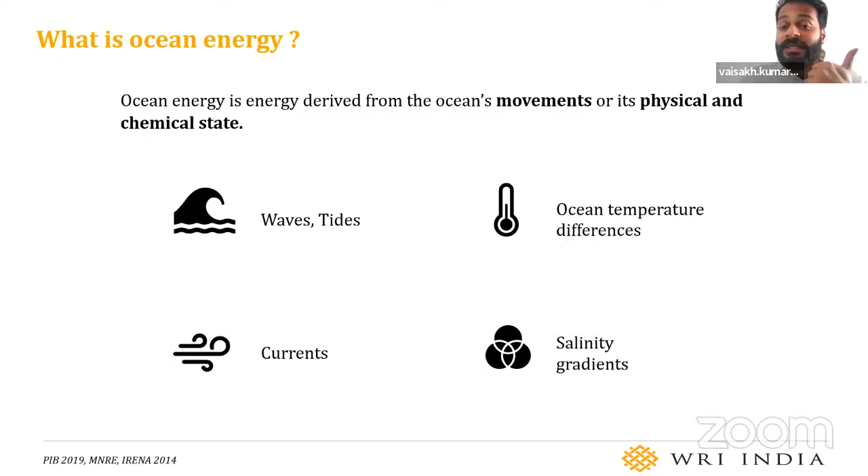Okay, so going through this one by one, just one sec. Yeah, so going through these technologies one by one to get to know them a bit more deeper.

The first popular way ocean energy is extracted is through ocean wave energy converters. They work on the principle of absorbing the kinetic energy and the potential energy present in the waves, or sometimes both, depending on the technology. Although there are many different technologies for wave energy converters, most of them can be classified under 3 main operating principles. Whichever wave energy technology is being developed, at the prototype or R&D stage, can be classified under these 3 main operating principles.

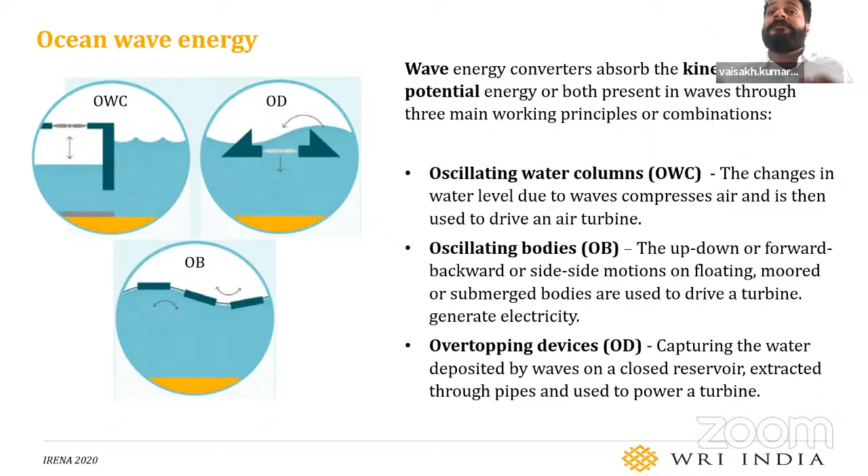The third working principle is called overtopping devices, OD, where there are structures that capture waves or the water deposited by the waves on these structures, which is then held and extracted through a pipe to power a turbine. So these are the 3 different working principles on which different wave energy technologies can be classified.

Moving on to ocean tidal energy, this works on 2 principles. One is based on the tidal cycle. Based on the 12-hour tidal cycles, once the tides come in, there is a difference of height, and it also harnesses the inflow and outflow of the tides. Based on these 2 concepts, you can have a tidal barrage system or a tidal stream.

A tidal barrage system works on a similar principle to a hydropower station. When it is high tide, the water at a higher level is held in a barrage, and once there is low tide, the water at this higher level is focused through a pipe, which then runs a turbine. So this is how power is extracted.

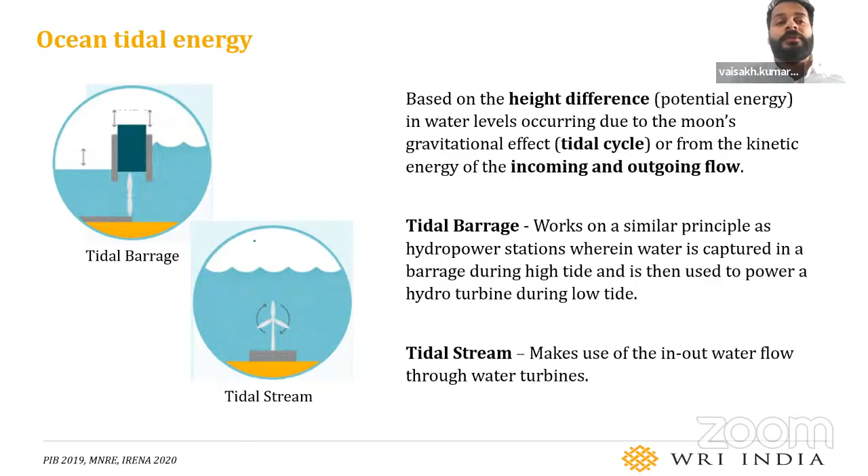The second is the tidal stream method, where with the onset of the tide, we see water move in and move out. This flow of water is harnessed through tidal streams - we have turbines or different technologies that may look like wind turbines, but these are actually water turbines placed underwater. When the tides come in and out, the water flows across these turbines, causing motion, and power is generated. So these are the 2 principles on which ocean tidal energy works.

Third, coming to ocean current energy - we have these global ocean currents, something similar to the Gulf Stream, that happen in particular patterns. So we can place turbines or different technologies on the path of these ocean currents to get power from them. But compared to wave and tidal, this has not progressed as much, because usually these ocean currents are located far offshore and in much deeper waters. So research development, pilot projects, demonstration projects, or R&D is much more difficult. Hence this has not witnessed much technology development compared to technologies like tidal or wave.

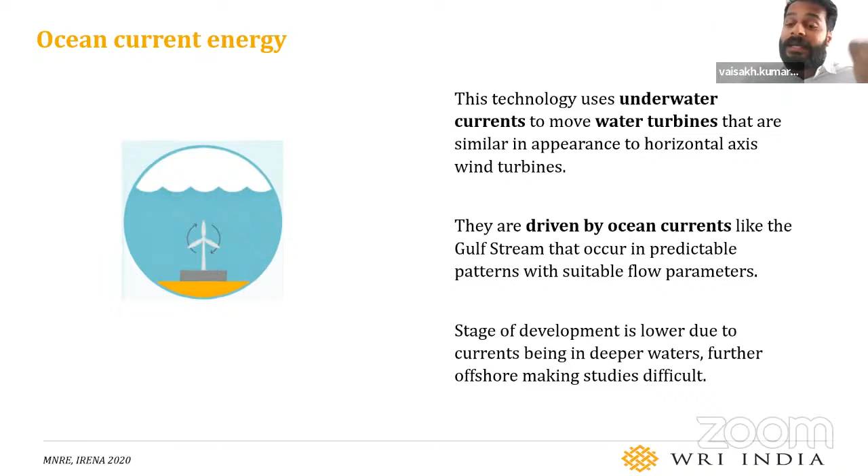Coming to the fourth concept, we can harness the temperature difference of the ocean. If you go deep, there is a drop in temperature, and at about 1000 meters depth, the temperature is more or less constant at about 4 degrees centigrade. For this technology to work successfully, we need a temperature difference of about 20 degrees centigrade. So if the surface temperature is more than, let's say, 25, it creates a temperature difference.

This temperature difference is used to power turbines through different types of thermal cycles. One is the open cycle, where the warm water on the surface itself is vaporized and used. The next is a closed cycle, where instead of warm water, another working fluid is used. Or when the open and closed cycle work one after the other, with the closed cycle working first and then the open cycle, this is considered a hybrid cycle.

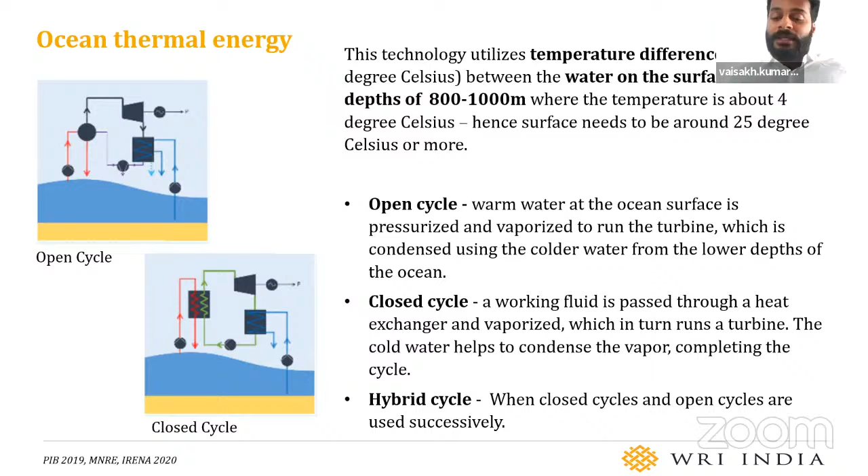So in summary, this harnesses the fact that there are temperature differences between the depths of the ocean. That is how ocean thermal energy is extracted. It's also commonly abbreviated as OTEC.

The next and last technology we'll be covering is the ocean salinity gradient. Basically, waters of different salt concentrations are held across a membrane, which causes the flow of ions, or creates a potential difference, or creates a pressure change, which then drives this particular technology.

With respect to ocean salinity gradient technology, two types of technologies have seen development: one being pressure retarded osmosis, PRO technology, and one being reverse electrodialysis, RED technology. So these are the different types of technology.

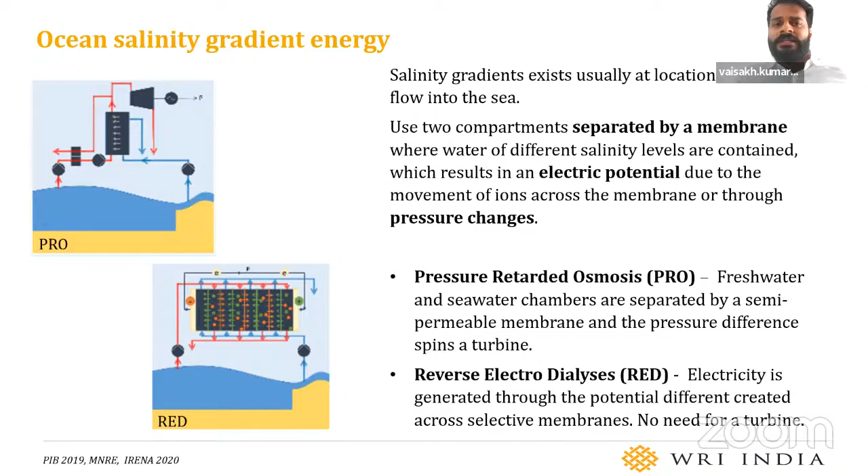To quickly see how the technologies have been progressing, or what the future potential is: we can see that tidal barrage is the technology that dominates the market with the most deployed capacities. Going forward, tidal stream may be picking up, along with wave technologies, which are being scaled up, with capacities of 1 megawatt and more being successfully deployed.

Looking at what's happening across the world, tidal stream is reaching commercial maturity compared to other technologies. There is also a convergence of technology where horizontal axis water turbines are being used, and the technology convergence is happening towards horizontal axis water turbines.

Wave energy is mostly in its prototype demonstration and scaling up phase, and wave energy technologies have yet to witness a definitive convergence towards a particular technology. Existing wave energy is being deployed through scaling up or deploying more such units in the form of arrays.

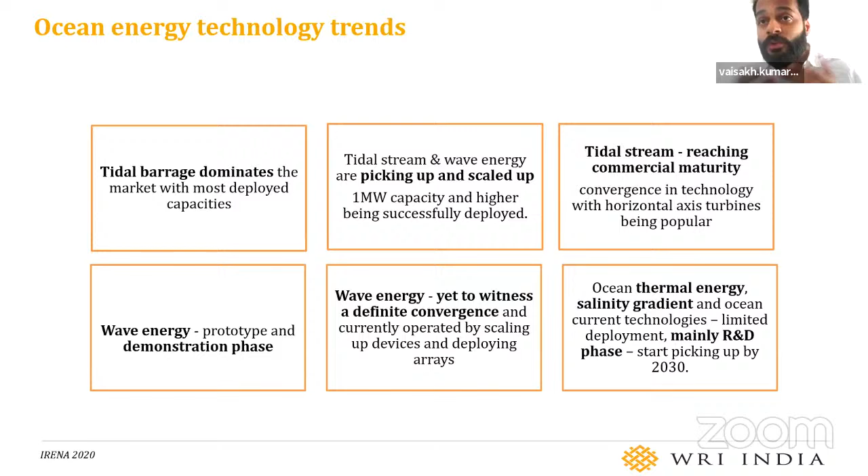When it comes to the other technologies we've seen, be it ocean current, ocean thermal, or ocean salinity gradient, these have seen limited deployment and are mainly restricted to the R&D phase, meaning mostly research and development in labs. But this is expected to start picking up by 2030 and later. So this is a quick overview on how these different technologies are doing right now and what may happen in the coming future.

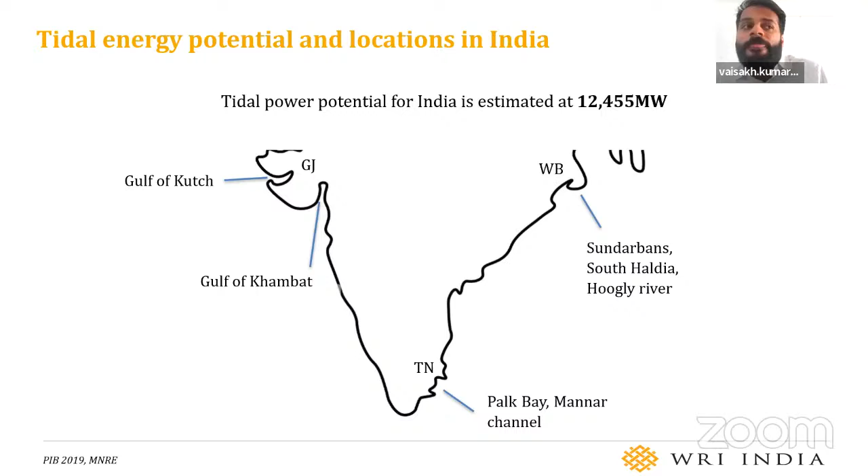Looking at some of the identified tidal power potential for India: the states of Gujarat, Tamil Nadu, and West Bengal, combined, have a tidal power potential estimated at about 12.5 gigawatt. Places where tidal power can be harnessed have been identified as the Gulf of Kutch and Gulf of Khambhat in Gujarat, the Palk Bay or the Mannar Channel in Tamil Nadu, and in West Bengal, areas like the Sundarbans, South Haldia, or the Hooghly River, where we can set up plants to harness tidal power.

Looking at the wave energy potential, this is estimated at around 40,000 megawatt. If we combine wave plus tidal potential, it comes to about 52 gigawatt of potential. There is not much information on the potential for the other technologies, so there is more scope for research and studies there. Also, when it comes to wave energy potential, studies have said that the western coast is estimated to be better for setting up wave energy projects.

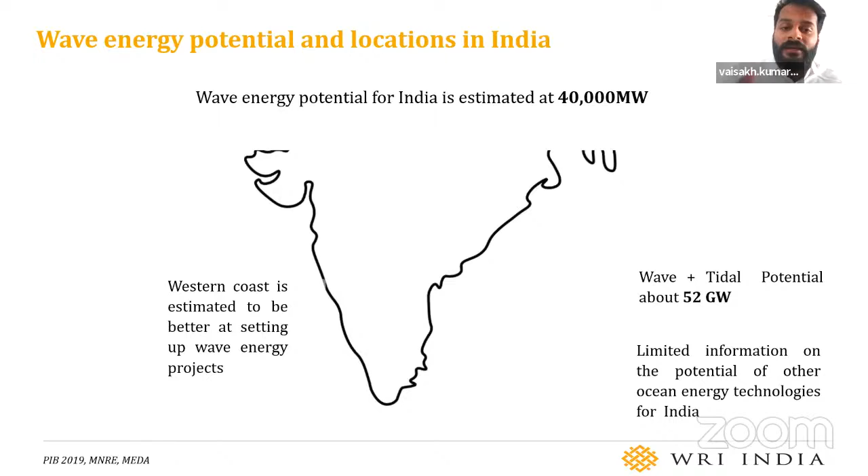That is why one of the first wave energy projects was set up in Kerala, on the western coast. So looking at the progress of different ocean energy technologies in India and some of the major developments in what has happened so far.

Also, we have seen that previously there were tidal energy projects planned for different states, but those have not witnessed much success due to the same reason being the high capital costs for setting up these plants.

Also, one of the first wave energy projects, a 150 kilowatt pilot project, was set up in Vizhinjam in Trivandrum, but this was set up back in the 90s and was decommissioned in 2011.

But there is a plan to set up a new 1 megawatt wave energy plant at a cost of about 15 to 20 crore in Kerala itself. Also, there is a plan to set up a 65 kilowatt ocean thermal energy conversion plant in Lakshadweep.

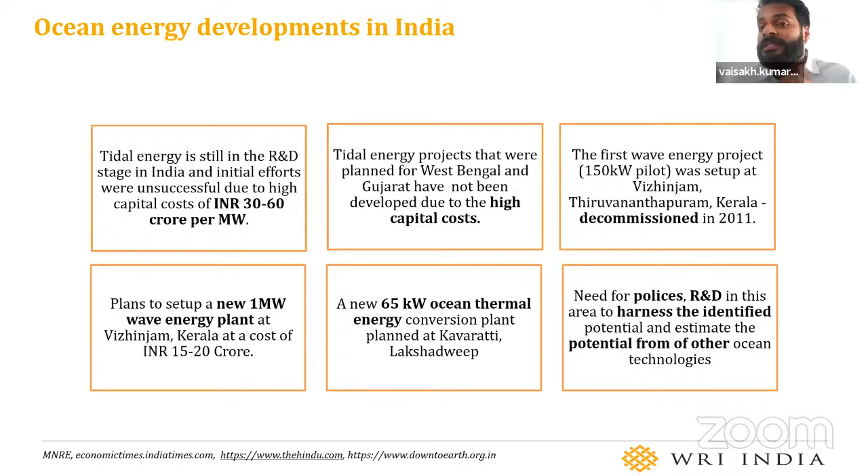What we can see is that there is a need for more policies, R&D, and efforts, so that the existing potential can be harnessed, and we can estimate the potential from other technologies that have not been estimated so far.

With that, I would like to conclude my presentation, and then back to you, Kajol.

Thanks, Vaishak. Thank you for the presentation. As I see, there is good potential for ocean energy in India, but there have been few challenges and barriers in scaling it up, considering the finance side or the maturity and readiness of the technology.

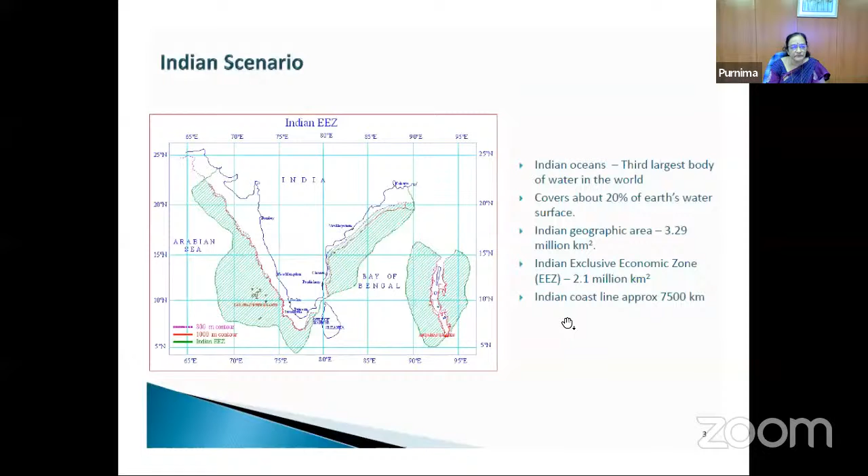Can you see the screen now? Yes. Can everybody see? Yeah, so this was the EEZ slide, which I showed. The next one—these are the forms that, yeah, so okay, here we are.

I was talking about this—this was the first ever self-powered desalination plant, and our priorities changed, so we decommissioned this in the year 2011.

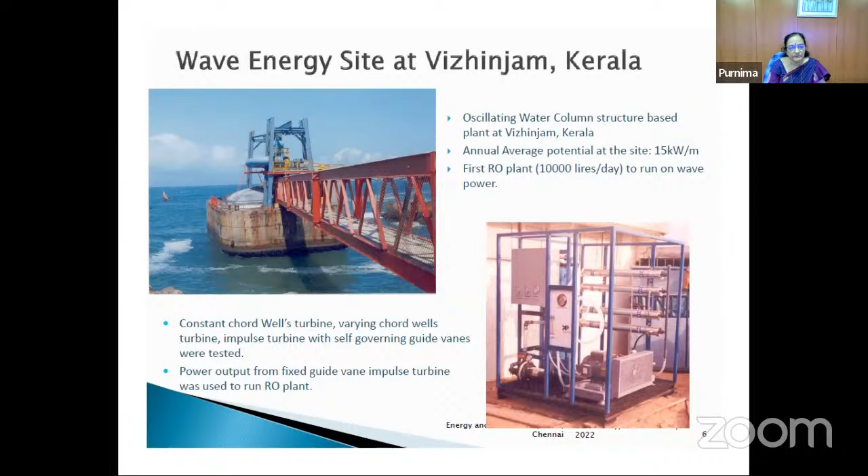Because we had larger programs on hand, we did not stop the wave energy activities, but we decided to move to floating devices for off-grid requirements in remote locations. One of them was the backward bent ducted buoy, which was the first small offshore plant that we did several trials on. We developed everything in-house, including the turbine. It was an oscillating water column based device, and that was successful in all our trials offshore.

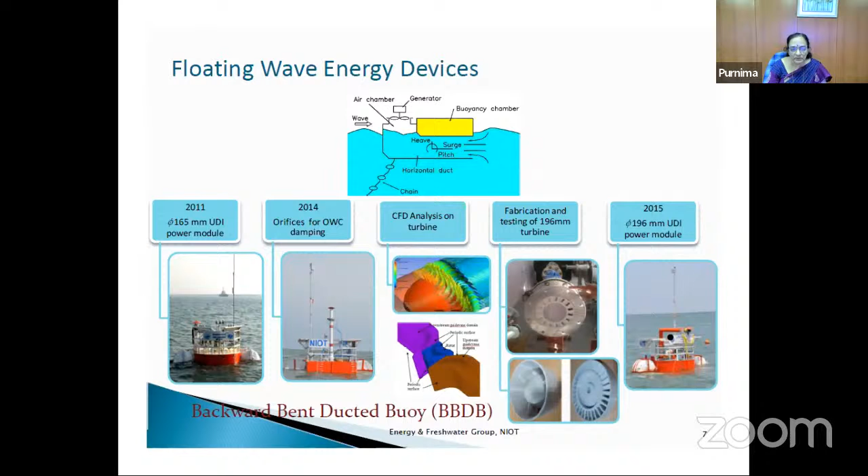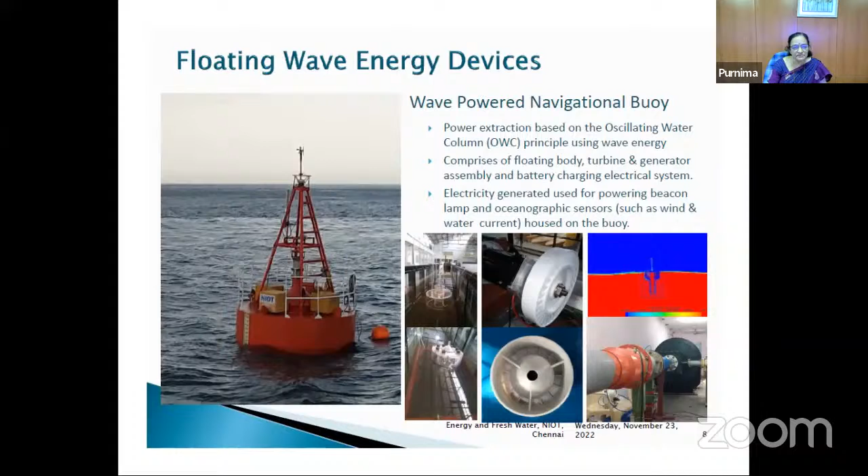This led to the development of the wave powered navigational buoy. Navigational buoys are required in all ports and harbors, and a lot of them are still being imported today, using solar panels for their power requirements. Here is a buoy we have developed which generates power from wave energy and lights the navigational lamp. But because it generates more power than required for the lamp, we have put current meters, wind sensors and other sensors on the buoy, with the port's requirements in mind. The data goes to the port directly on a mobile, which is a value addition for them, and they're very happy. This is functioning as one of the navigational buoys in the Ennore port today. We have also transferred the technology to a few industries, and we will be making more of those shortly.

This is something we have again developed in-house, from the CFD analysis through the wave flume testing all the way to the actual prototype demonstration in Andaman. Places like Andaman are requiring and have requested me for 1 to 5 kilowatt off-grid units, because these are security areas with just a few manpower in remote locations, and they don't have access to power or water. This is also something we have developed in-house and is ready to be scaled up.

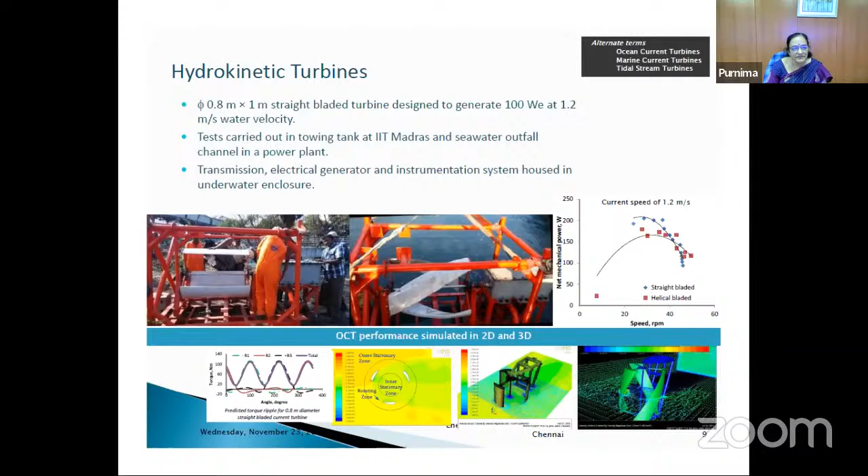This is the demonstration that we did in Andaman—just a few pictures of that.

The in-house development of low-speed alternators had to be taken up because around the Indian seas, the velocities of tidal streams and ocean and marine currents are fairly low. Alternators for such low speeds are not available off the shelf, so we had to develop these in-house. So we have the entire power module, the turbine and the generator already developed in NIOT.

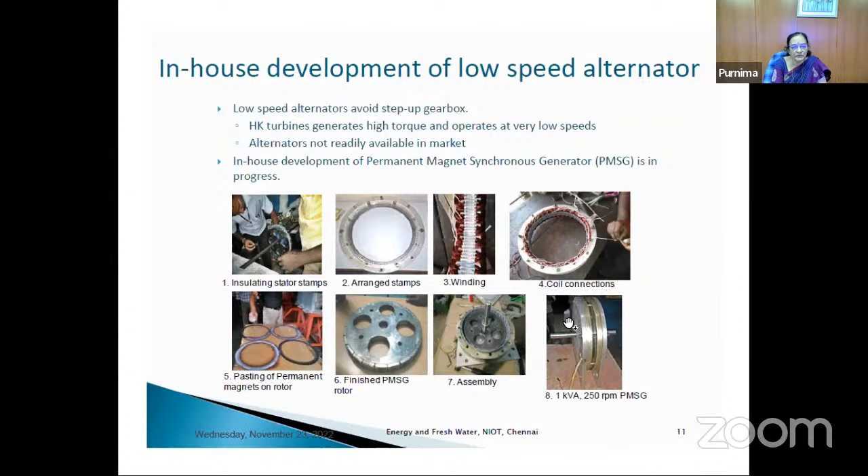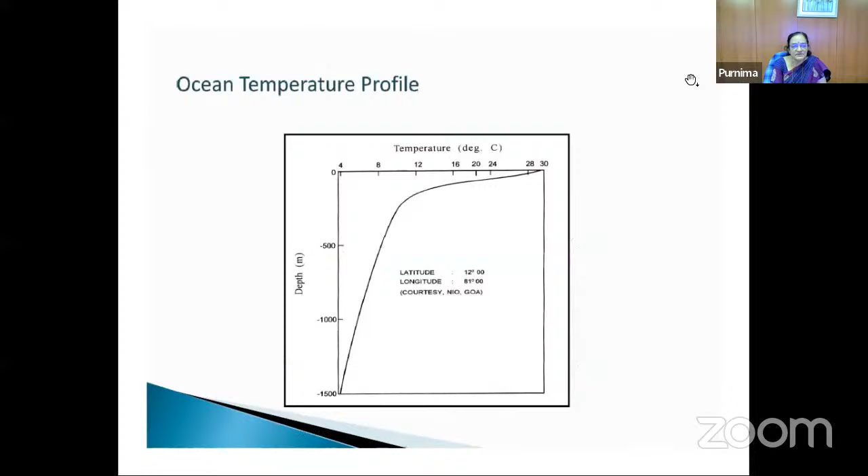Now comes the ocean thermal gradient. As Vaishak had mentioned, as you go deeper the water gets colder, and a large belt around the equator is where the temperature gradient hovers between 19 and 22 degrees Celsius, and this can be utilized to generate energy.

This is just a picture of the OTEC cycle. I'll talk about it later.

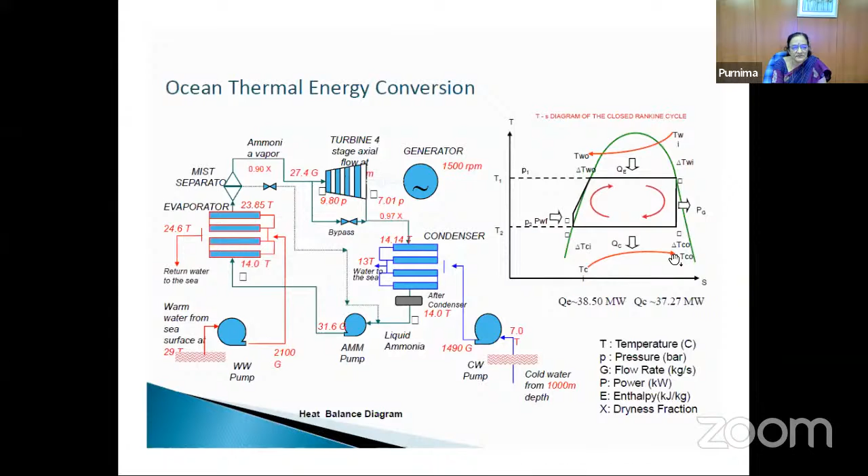Way back in the year 2000, we were very ambitious and decided to put up the first ever floating 1 megawatt OTEC plant at Tuticorin. We built everything indigenously, including the barge, though the heat exchangers were imported. The pipe is a 1 kilometer long pipe of 1 meter diameter, and all the subsystems were tested. However, we could not deploy the pipe because the marine infrastructure in those days was not available. We did not have adequate infrastructure and the right kind of vessels to do this deployment, so the final connection of this pipe could not be made to the barge.

Since we are the government, we had to have a series of review committees on how to take the project forward. It was decided that we were not yet ready for deep waters, so we decided to do desalination, which also uses the ocean temperature gradient, but in shallower waters, maybe like 300 meters.

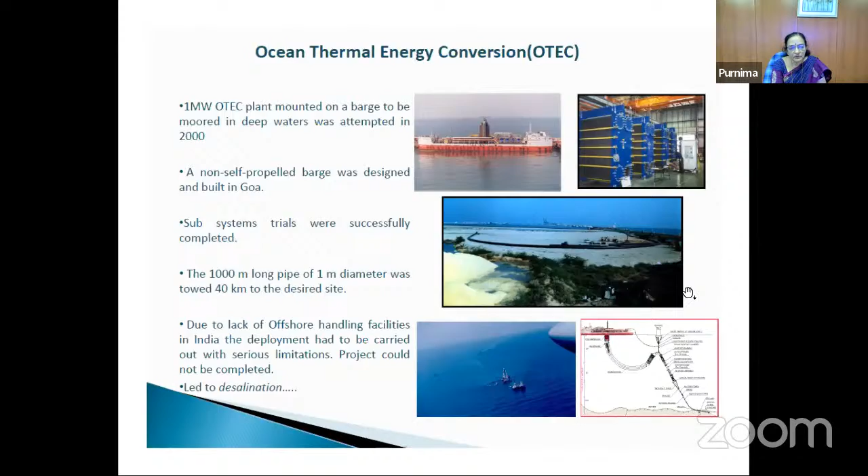This was the genesis of the first ever desalination plant in Kavaratti in Lakshadweep in the year 2005, using the ocean temperature gradient to make fresh water. This became so successful it helped the local islanders improve their health, since they did not have access to clean water at all. This was followed by two more islands, Agatti and Minicoy. Today the Ministry of Home Affairs has funded NIOT for 6 more such plants in the remaining islands.

At the same time, because the deep water is very far from the mainland, we decided to try a 1 million liter per day scaled up plant offshore of Chennai. We went back to the same OTEC barge with a long pipeline, again 1 meter in diameter. We are also doing power plant based desalination, but I won't speak about that today.

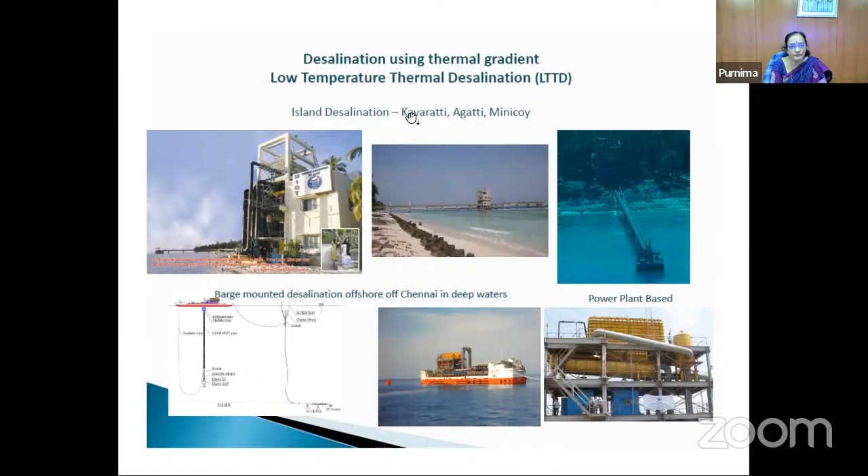Basically, for all desalination systems, the heart of the desalination system is the energy requirement.

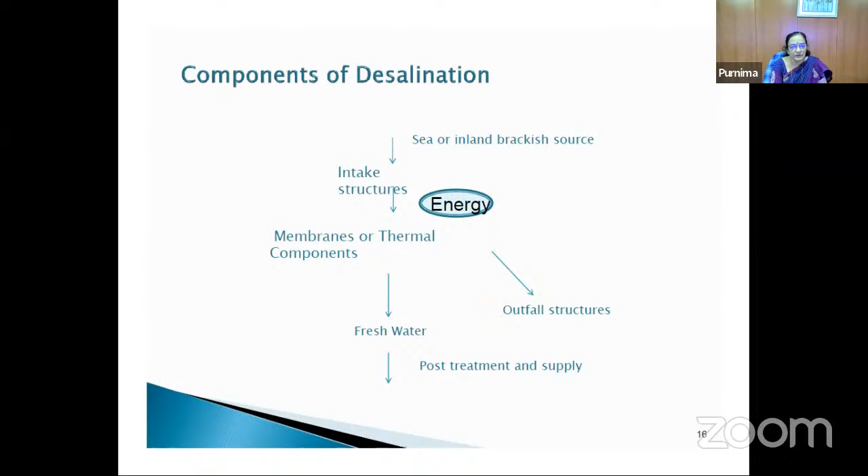So to that end, we are going back to OTEC, having learned a lot in the last couple of decades and mastered the desalination technology. We are going back to OTEC because all these island plants are being powered by diesel generators. This time we are introducing the OTEC cycle, which as Vaishak mentioned will produce about 65 kilowatts. This power will itself drive the desalination system, so we don't aim to produce extra power for the grid, only to power the desalination. It will be a self-powered system.

This has a huge number of challenges. The two main ones are the complex turbine design, which will be done in India for the first time and is already nearing completion, and the longest cold water pipeline, about 4 kilometers long, with its end at 1,000 meters water depth, drawing water of the order of 7 to 7.5 degrees Celsius.

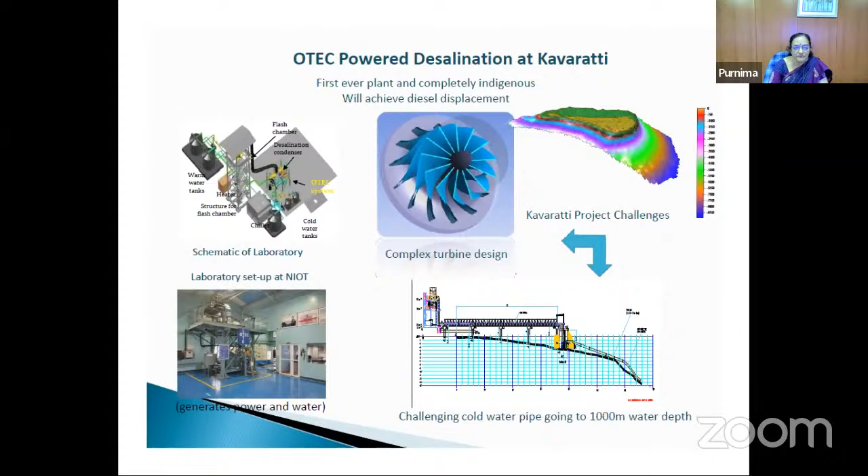So these are all the technology developments that NIOT has been attempting, and has been very successful so far. But what are the barriers for ocean energy to scale up and take off? One is that India still has comparatively low marine infrastructure. The demonstration projects are not high enough in scale, and there are a lot of perceived risks which may not really be risks.

We have a lot of handle on offshore work right now, but still there are a lot of perceived risks. The techno-commercial viability is difficult to assess on small devices, and therefore funding becomes difficult for larger ones, which are capital intensive. So this is a circular problem which needs to be mitigated in some manner.

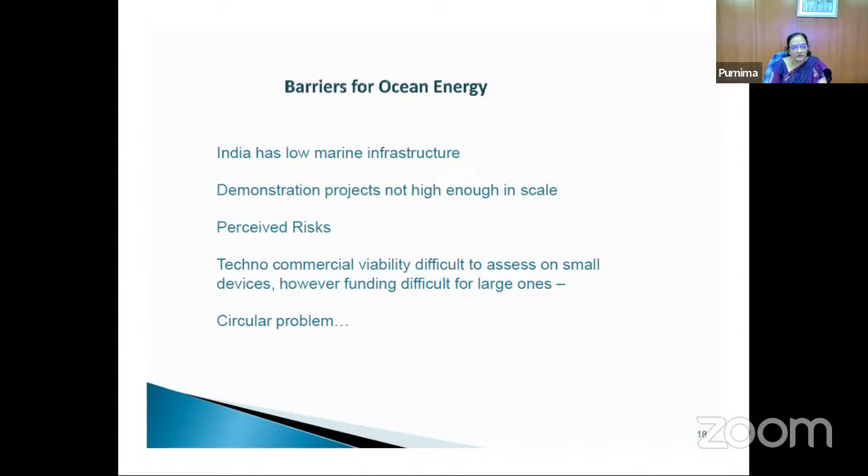The Indian government has taken a lot of initiatives in the last few years by developing several mission mode programs. I'm just mentioning four of them which are relevant here: the Blue Economy Policy, led by Ministry of Earth Sciences, to which I belong; the Desalination Mission, led by DST; the Deep Ocean Mission, led by the Ministry of Earth Sciences; and the Hydrogen Mission, led by the Ministry of New and Renewable Energy, MNRE.

Under the Blue Economy Draft Policy, there are several priority areas. Number 6 consists of coastal and deep sea mining and offshore energy, and here's where ocean energy will have a place.

Some of the steps being taken for furthering ocean energy and desalination: MNRE has now notified that tidal, wave, and OTEC can be considered as renewables, meaning they are eligible for meeting the non-solar renewable purchase obligations. MNRE recently floated a call for proposals for renewable energies, which included ocean energy. The call is over and they are being evaluated.

Parallelly, a desalination mission was started and there were calls for funding proposals under that. Also, preferable ones under that call were those powered by renewable energy, including ocean energy.

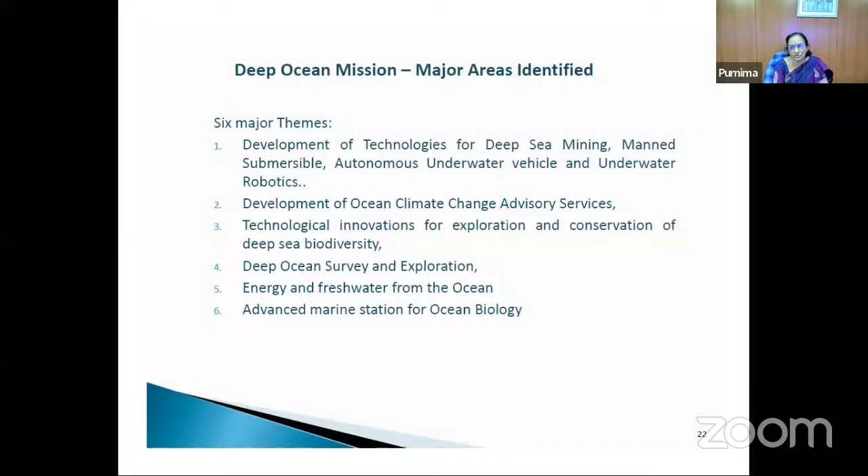And there is a Hydrogen Mission. Our ministry also wants to be part of it by doing hydrogen work as we are doing it in the OTEC project. So it's important to see this in conjunction with renewables, and therefore offshore OTEC and desalination could be looked at in conjunction with hydrogen, and that's what we are trying to design currently.

Lastly, the international efforts. I struggled hard to make India a member country in 2016 of the Ocean Energy Systems Technology Collaboration Program under the International Energy Agency. The last couple of years, I have also become the vice chair of this committee, which consists of 24 member countries.

Recently, we released a white paper on OTEC led by me for policymakers, because we thought it's important to educate policymakers, as there are so many things that they don't know. This was prepared by a subgroup of countries consisting of Japan, India, Korea, China, France, and the US, and it has now been released.

New tasks that I have taken up under the OES TCP are one on OTEC economics for plants, and also ocean energy powering desalination, because not all countries have this water issue. The water stress in India makes desalination important, but because of the energy requirements, ocean energy powering it can really be a way forward.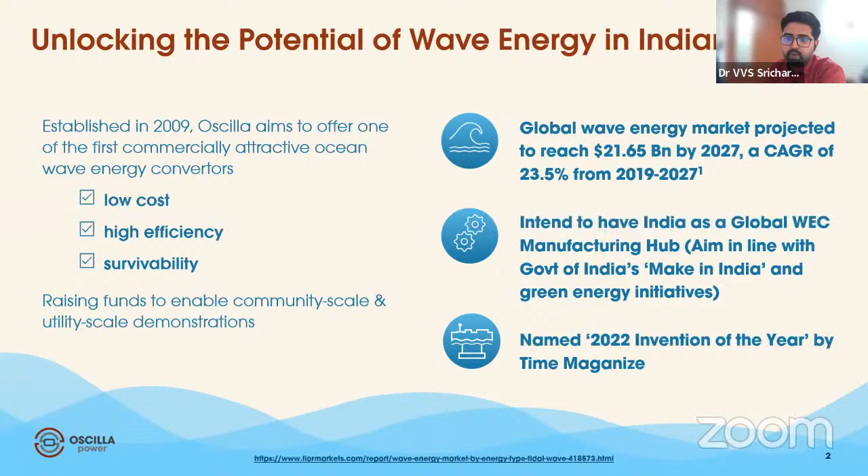Our objective is to demonstrate an India-specific utility-scale wave energy converter called the Triton Wave Energy System near Adani Port at Vizhinjam, where we will exhibit cost-effective generation of electricity for the Indian market by utilizing domestic manufacturing facilities to their full potential.

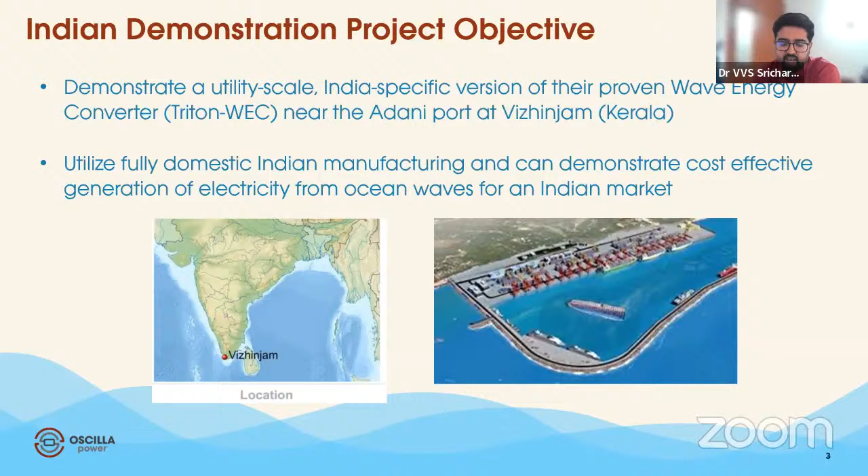The motivation behind the project is that India has an indicative figure of 10 to 20 gigawatts of tappable wave resource. Therefore, we need a potential system optimized for Indian waters, which can create high energy production even at such moderate wave resources.

It's also important to notice that wave energy is a lot more consistent, reliable, and predictable than other variable renewables, and it provides a better match with loads by complementing solar and wind energy. As a result of higher power density, wave energy systems need far less space to extract the same amount of power. That said, it is extremely challenging, as previous speakers also pointed out, to extract it cost-effectively. Even today there is no commercial system.

Yes, it is challenging, but there are benefits. That's why we are all pressing on hard, trying to develop such technology.

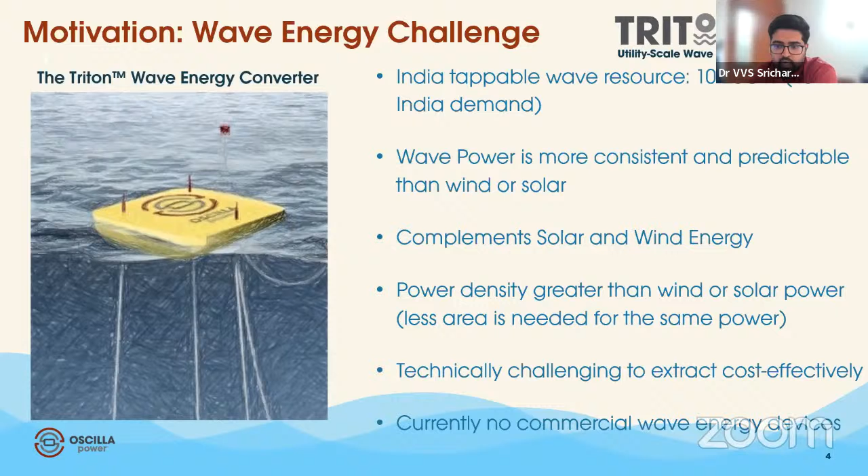The design of the Triton system is optimized through extensive hydrodynamic modeling and lab tests. With a 1 megawatt rated power, we have an annual average power of 200 kilowatts with a competitive capacity factor of 15 to 20%, close to onshore wind. We have developed this device to be installed in arrays, cutting down the LCOE to under 7 rupees per kilowatt-hour when scaled, comparable to solar and wind as of today.

This technology is also designed to survive extreme conditions. On the west coast of India, at Vizhinjam, the extreme conditions are far less relative to the east coast. Nevertheless, there are some extreme events the device needs to survive.

Being a floating system falling under the category of point absorber, it is simple to tow it from shore to the point of location of interest and scale it up, thereby reducing installation costs. Since it is floating with the foundation system at the bottom, we have minimal environmental impact as well.

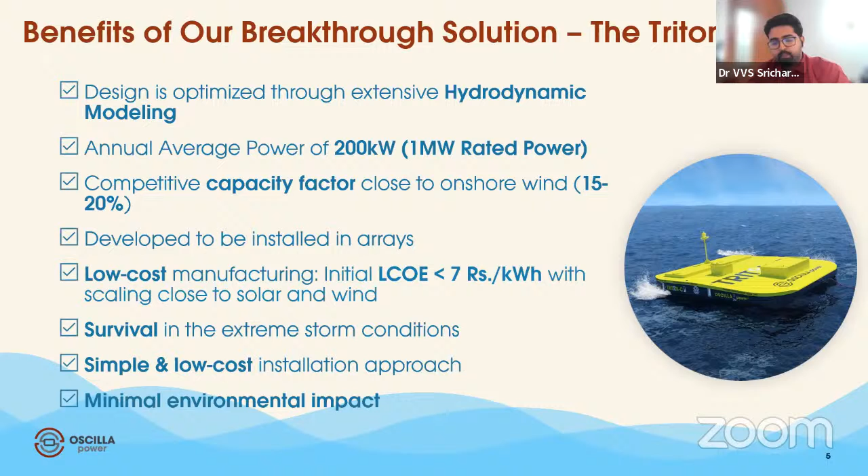So I would like to share a few details of our project at Vizhinjam. As I said, it is designed for India specific with low energy climate, what we have here. The first pilot project cost is 19.8 crores in Indian rupees.

We have also submitted our proposal to MNRE, and the project is led by IIT Madras. We have also made an agreement with the Kerala State Electricity Board to purchase power when we scale it up and connect to the grid.

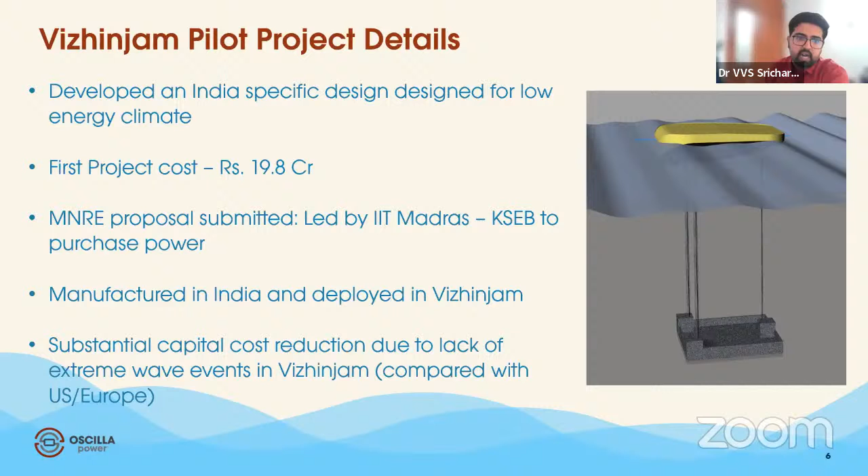We intend to manufacture the entire system in India and deploy it in Vizhinjam in a couple of years from now. One thing is, though India has low energy climate compared to US and Europe, one advantage we have is far less extreme events, especially on the West Coast, compared to other European countries or US. This can substantially cut down the capital cost, so that's an added advantage for the system as well.

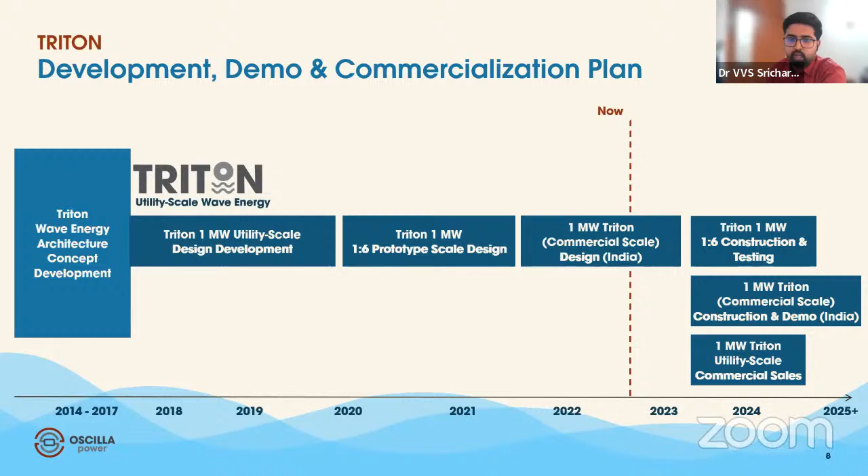If you would like to know the latest updates on our project and other R&D and commercial work, please check out the website. If you have any questions, feel free to contact us through the different email IDs we've given you. That's it from my side. I would like to thank the World Resources Institute India for providing the opportunity, and feel free to ask me any questions.

Thanks, Sricharan, for this presentation. I think you went a step further when looking at the scaling, the sizes after the demonstration, and now looking at the scaling of the technologies. Since we are short on time, I will directly move on to the panel discussion. Thank you so much for the presentation.